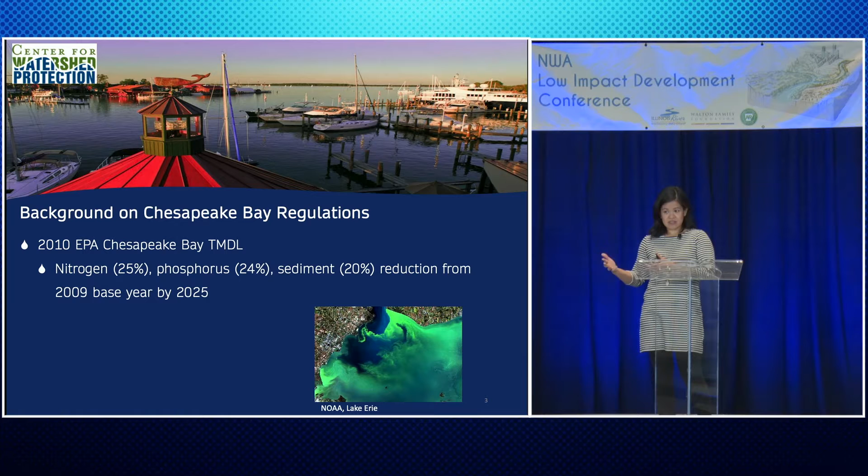But a lot of times the reason why the algal blooms are bad for the environment is because when algae die, all this algae sinks to the bottom of your river or lake or whatever, and it's the bacteria that break down that algae. It uses oxygen to break down the dead algae, and it sucks up all of the oxygen from the water column and basically creates a dead zone.

So what happens is a fish is happily swimming and hits this dead zone and basically just suffocates. And it creates these fish kills like in the picture on the left. And so that's why nitrogen and phosphorus is a huge issue when it comes to water quality. And the TMDLs are all based off of, what is it called? Your swimmable, fishable, drinkable. Because it's part of the Clean Water Act.

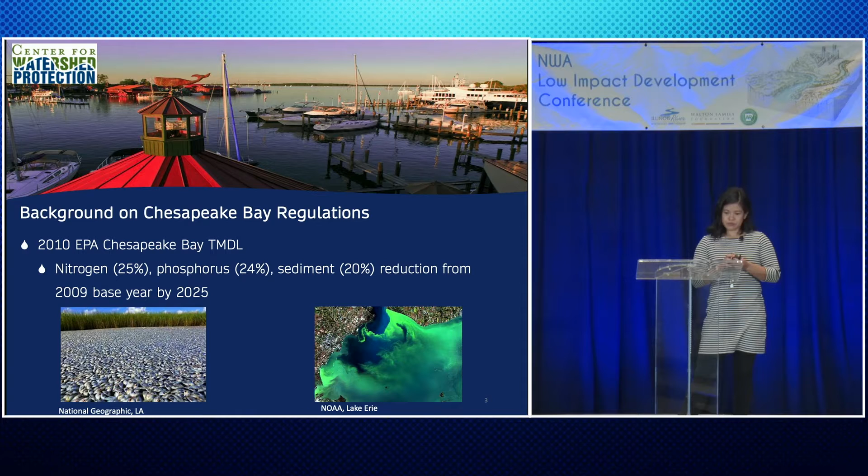And the fishable part and the macroinvertebrates and the stream health is actually an extremely important part in a TMDL. And so that's one of the reasons why nitrogen, phosphorus, and sediment, which we typically just call nutrients, are a huge issue in the Chesapeake Bay. We talked about this, 6 states and DC. Here's a little map of the Chesapeake Bay watershed.

The collaboration process involved in this Chesapeake TMDL is very stressful, but actually an amazing feat that the EPA and the Chesapeake Bay Program have done. So within these 6 states and DC, there's actually 5 sectors that everything is kind of divided into. Let me see here. Let me go back real quick. Sorry, I did the animations too early.

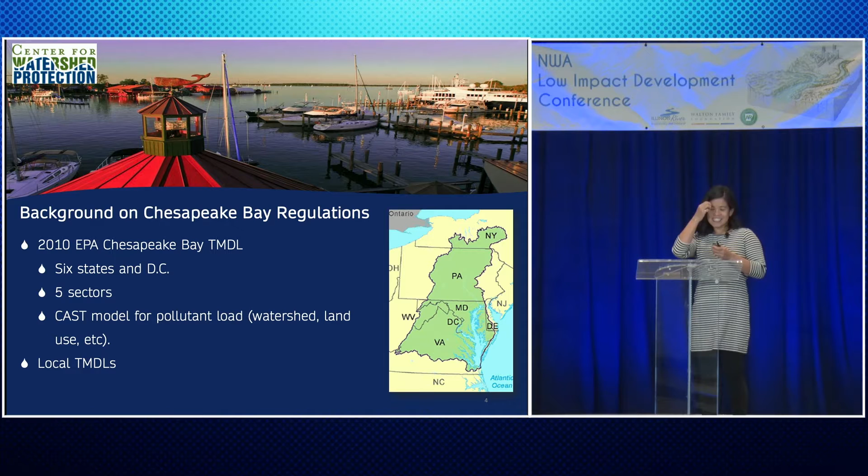There's 5 sectors that it is divided into. So the nitrogen reduction is divided into agriculture, natural, septic, stormwater, and wastewater. And this is very unique, I think, to the Chesapeake Bay. What I'm going to focus in on is stormwater, because that's where urban sits. So a lot of how you regulate it is in this stormwater piece, and it's urban stormwater. So it's regulated through the MS4 program.

And then this graph here is the actual nutrient load allowed, that is planned, I guess. So the first column is the 2017 load, and then the gray one on the right is the 2025 target. There's this target that EPA gives you, and it's up to Maryland to decide where in each sector and where in each watershed that reduction is actually happening.

And how they calculate this pollutant load is through this thing called the CAST model. I actually don't know what it stands for. It's Chesapeake Bay something, something tool. And this CAST model is something really, really smart modelers put together to estimate the pollutant load out of every watershed. The whole Chesapeake Bay is mapped out with every watershed's land use and their expected contributing nitrogen, phosphorus, and sediment load. So a lot of math goes in there and outputs something, and then the counties have to meet these regulations.

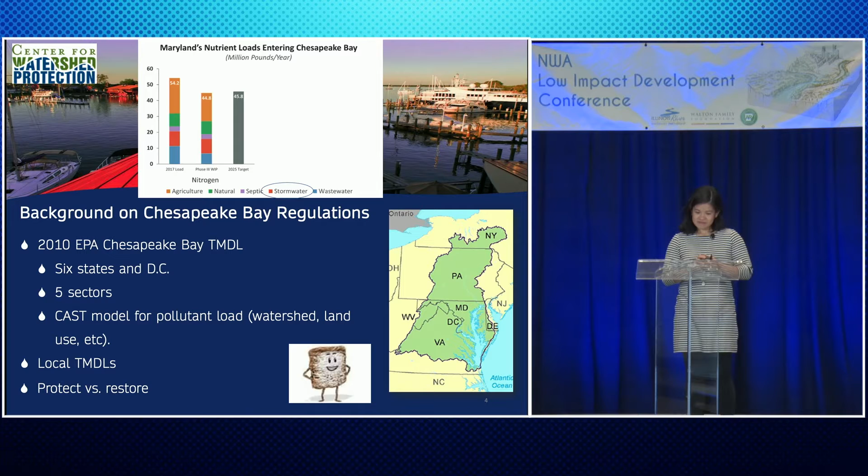The mini wheats thing, save some of the mini wheats.

So next I'm gonna go into DC stormwater regulations. So DC is very different than Northwest Arkansas. It's 43% impervious area. It is a phase 1 MS4. It is also a mix of MS4 and combined sewer. So it's about 2/3 MS4 and 1/3 combined sewer.

And in the combined sewer, like Henderson talked about, that is managed through their consent decree, and green infrastructure is required through that consent decree, but that is separate from the MS4 permit. And so in the MS4 permit, I am an engineer, so I included some equations. You don't have to understand them. If you really want to understand them, everything is in the Stormwater Guidebook, which is on the DOEE website. So DOEE, the District Department of Energy and Environment, manages the MS4 program, and DC Water manages the combined sewer program. So they're two separate organizations, which gets a little bit confusing.

So for the stormwater regulations, the retention requirement is if there's land disturbance or substantial improvement more than 5,000 square feet, you have to retain 0.8 or 1.2 inches of that stormwater per square foot. There's a little asterisk because there's a lot of caveats with DC. There's a lot of little nuances about this rule, but I just simplified it because it's not super important in this presentation. So that equation there is kind of how you calculate it. It is based off of the runoff coefficient and the size of your land disturbance.

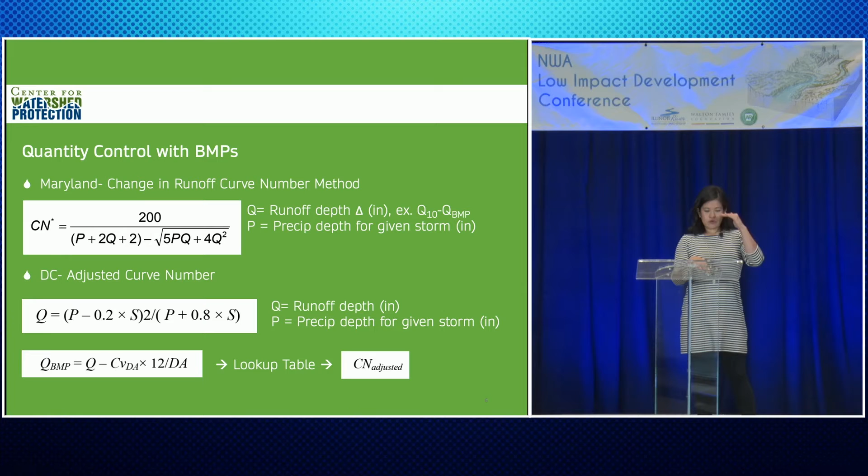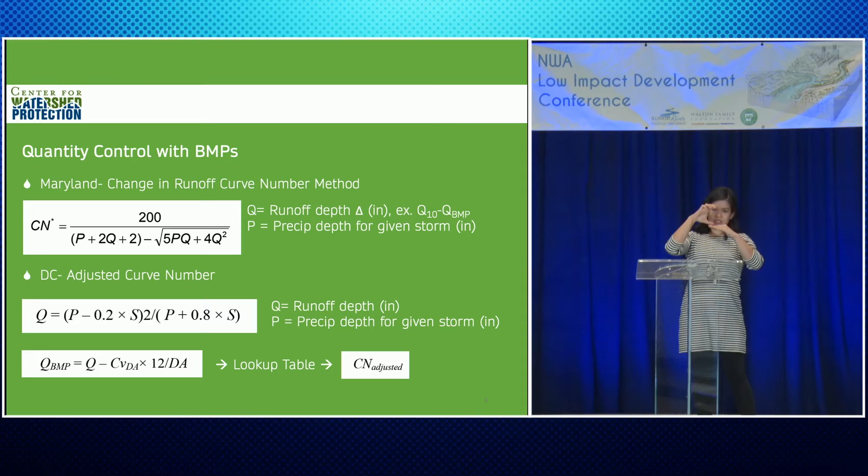I added this slide because Andy talked about quantity control and BMPs and requiring both things and it not being integrated into one calculation. In Maryland and in DC, there's different methods of how they incorporate BMPs into their quantity control. I'm not gonna go into detail about the exact math of these two things, but they're all based off of a curve number and changing your curve number. So you have your existing curve number and then your post-construction curve number. It's to decrease this curve number by a little bit based on the storage you have with your BMP. So then you have this difference that you have to account for.

So here is a list of approved BMPs in DC. Again, I want to emphasize that these are for MS4 regulations. For the TMDL, it's something slightly different because TMDLs don't just cover urban stormwater. In the Chesapeake Bay, you can also have restoration projects, which are not technically part of your MS4 program, to meet your TMDL goals. So what I'm talking about here is specifically for your MS4 BMPs.

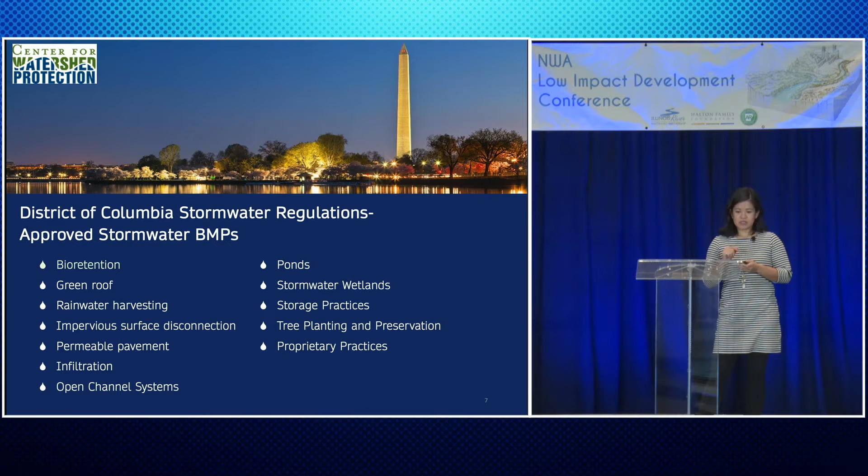And there's bioretention, green roof, rainwater harvesting, permeable pavement, but I'm just gonna focus in on bioretention because I only have 30 minutes left. So what exactly is a bioretention? Sometimes it's called rain gardens, sometimes it's called bioswales, biofilters, biofiltration. The previous speaker called it stormwater control measures. In DC, we call them best management practices, and we're probably gonna change that name because of the problem with the word best, but that's what I call them, so that's what we're calling them here.

So bioretention, basically all of these things are somewhat similar. It's a depression in the ground, it has plants, and there is some sort of soil media that allows for infiltration. And it may have an underdrain and it may have a gravel layer.

So the plants are really important in a bioretention. It's just part of the bio part of bioretention. The plants have multiple purposes. One, it sucks up the water, which in turn sucks up the nitrogen and phosphorus. A lot of that's dissolved in the water, and uses it as fertilizer. And so the plants suck up the nutrients, aka the pollutants of concern in the Chesapeake, and then that water evapotranspirates back into the water cycle. So it kind of removes that water from the stormwater system.

And then the roots also allow for basically keeping the soils fluffy, because compaction is a big issue when it comes to bioretention maintenance. Once that soil gets compacted, water can't filter through, right? And so the plants and the plant roots help keep it nice and fluffy and water still able to move through the water column.

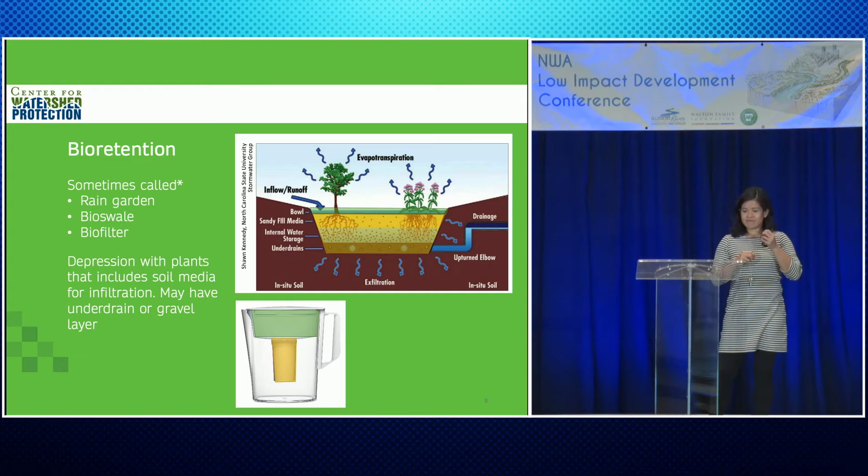And then there's your filter. A lot of stuff is happening in there. And it can't just kind of flush straight through because it does need time for the soil particles to do whatever reaction it needs to, whether it's absorption, adsorption, just simply filtering it, holding back some of the larger pieces of sediment. Whatever it is, some time needs to pass for that water to trickle through and be clean from the filter media. And then cleaner water comes out the other end, just like in a bioretention.

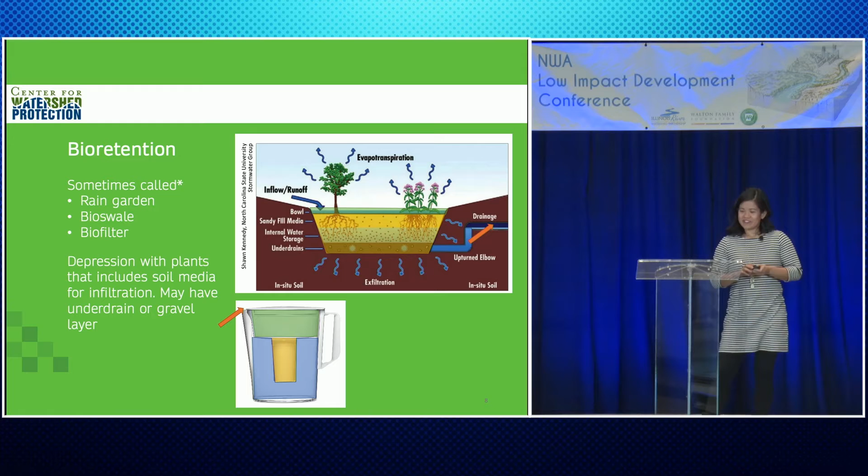The cleaner water can either exfiltrate into the ground or come out of the underdrain into the storm drain pipe. Oh, and it also has to leave the system as cleaner water. So, great, water has disappeared. What actually happens? Like, is that blue piece of water actually cleaner?

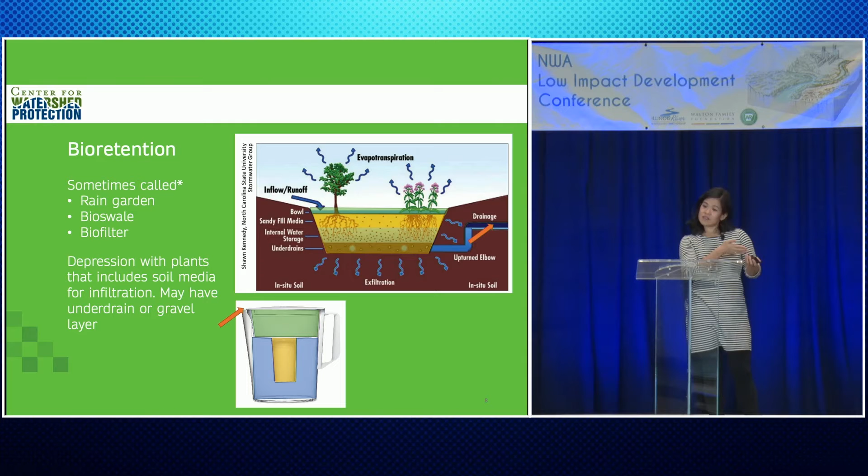There's a lot of research out there that has been done to measure what your actual removal efficiencies are. Minnesota does a lot of work, and Ohio State, and Kentucky, and there's just a lot of schools that do bioretention performance research. The reduction number is really based on how it was designed. And it's always hard for me to say, oh, it's 75%, because it really depends on what your design criteria are and how it was designed when you were testing it in the lab.

So one example I pulled out is the Minnesota Stormwater Manual, and they provide recommended pollutant removal efficiencies. But again, it really depends on how it was designed. And I think these removal efficiencies are based on Minnesota's design requirements.

And so the way that DC kind of gets out of doing this kind of calculation and really thinking about the removal efficiencies is that they just base everything off of the retention volume. So that volume that gets sucked into the ground, we're saying that it's a 100% removal efficiency rate because, in the sense of the bioretention and out the storm drain pipe, the water's not there anymore.

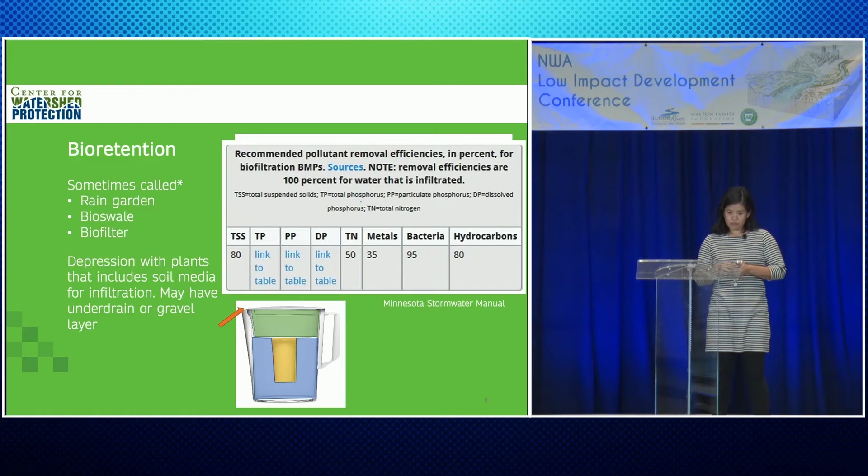And one of the important things is that it really depends on your pollutant of concern. Taking a stormwater manual from California, they might not care about nitrogen and phosphorus nearly as much as the Chesapeake Bay does, or you guys might not care about nitrogen and phosphorus. I know you guys do, but let's just say every state and every jurisdiction and every water body has different concerns, and to have an overarching design criteria, I think doesn't fit with how

bioretentions are designed. So I just want to point that out, that there is no one right answer in terms of design criteria, but I will talk about DC's design criteria just to give you an idea. When you break it down, every criteria item, there's a reason for it, and I can probably tell you the reason for almost every single one of these and why it is the number that it is for DC.

So it's really important to think about when you're looking at your design criteria, why was that number created? And DC and the Bay Area tend to be a little bit more picky about these details than some other states might be, so you don't want to add undue requirements for reasons that you might not care about, that might not be important to your water body.

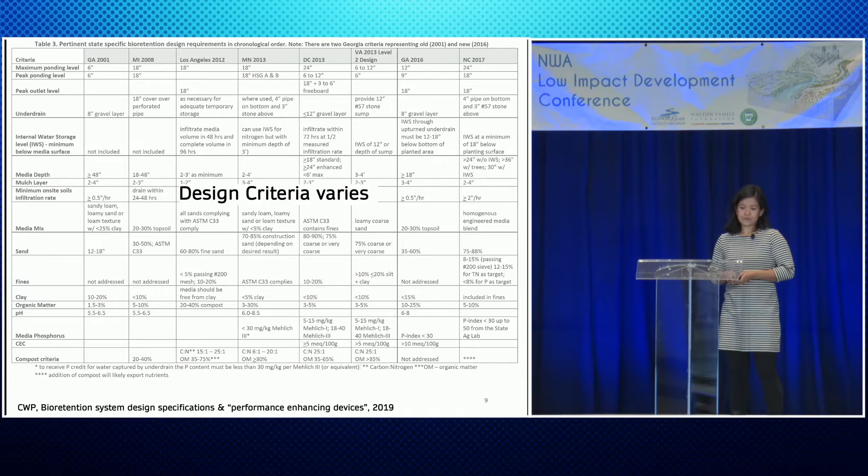So, DC's bioretention design criteria. One of the first questions to ask is there infiltration into your native soils? In DC, we call it infiltration, but a lot of places it's called exfiltration because you're leaving the system. Best case scenario is you have some nice sandy soils and water just kind of trickles down into the ground. Not typical in DC. It's very, very urban. Everything is redevelopment. And so a lot of the times, I would probably say 50 to 75% of plans that I see are standard design because there is no infiltration into the native soils.

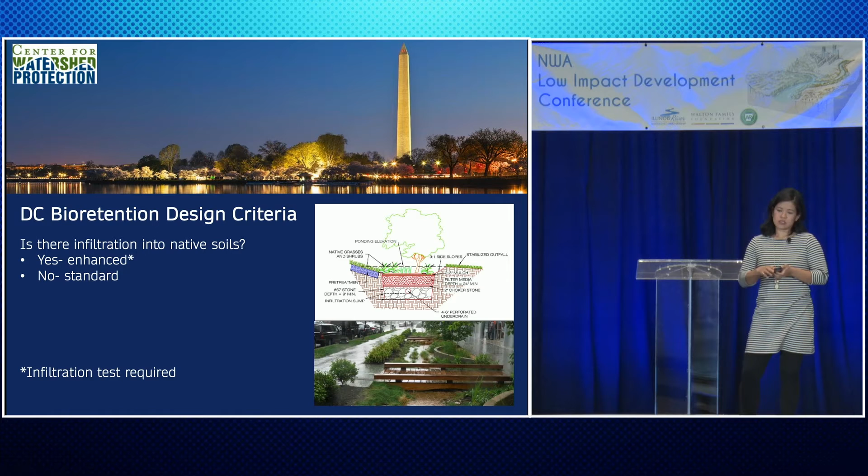So if it does have infiltration, it's enhanced. If it doesn't, it's standard. It's kind of how, in Virginia or Nashville and Fayetteville, there's a level 1 and level 2. It's kind of that idea of, there's a higher standard for better infiltration systems. And an infiltration test is required in DC.

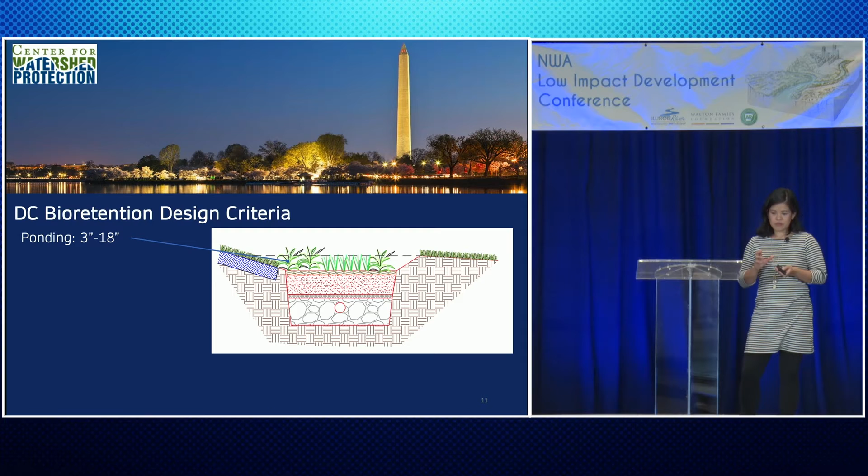So I'm just going to go through really quickly some of the design guidances. Ponding, 3 to 18 inches. Filter media, depends if it's standard or enhanced. And the filter media depth is really about, in the end, the retention time. You need a longer system, just like your Brita filter, right? If you want it to retain for longer and water to have a longer time of concentration, time passing through all of the different medias, because that way the filter media has the ability to absorb some of the pollutants in the water.

In the filter media composition, typically a lot of times it's mostly sand and very little organic content. The organic content percentage really varies a lot depending on what jurisdiction you're in. In DC, we don't allow for high organic content because nutrient is the pollutant. So if you have high organic content, you're just repolluting your water. So that's one of the reasons why.

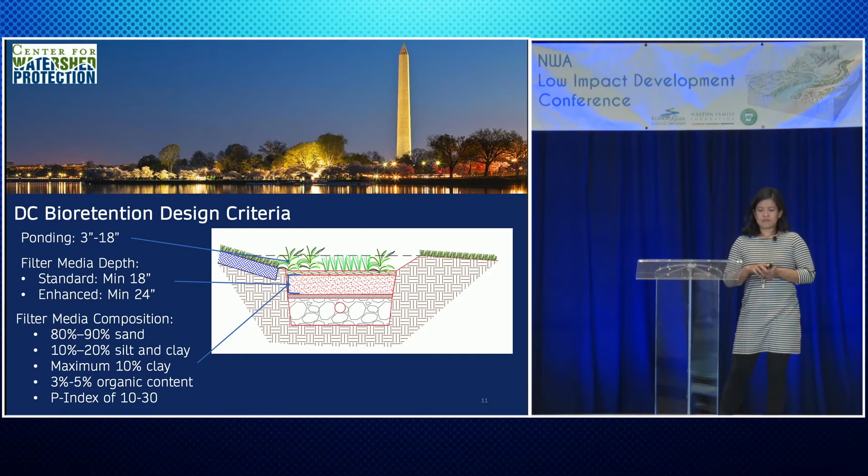And there is a lot of debate about this because super sandy soils, low organic content, does not make a good space for plants to survive. So, we always want to say, we want to plant native species in our bioretention and have pollinators, but these aren't native soil types. They're not happy places for plants. So we have to be very strategic about what type of plants we put into a bioretention and make sure that they survive with these filter media requirements.

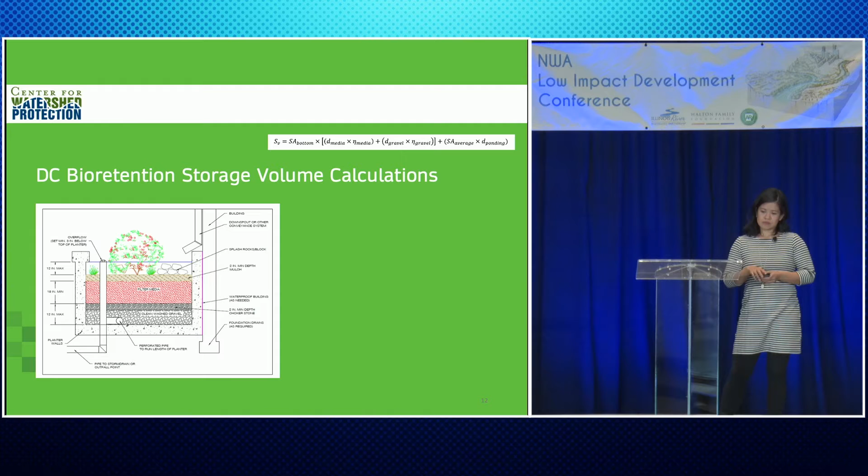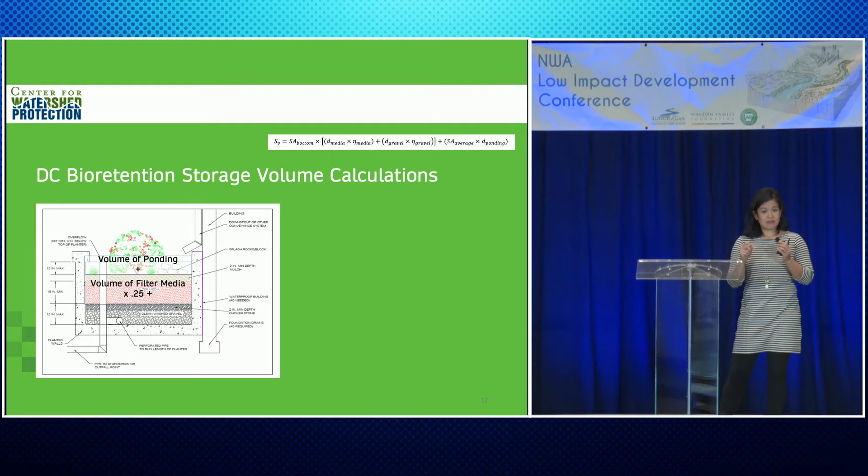So next, some more calculations. How does DC calculate their storage volume? It's designed like a planter box, basically. Here's the equation, but I'll break it down. It's very, very simple. It's basically the volume of ponding that you have, plus the volume of the filter media times 0.25, which is the porosity of the filter media. So that's the little pore space. 25% of that volume box of filter media can be filled with water.

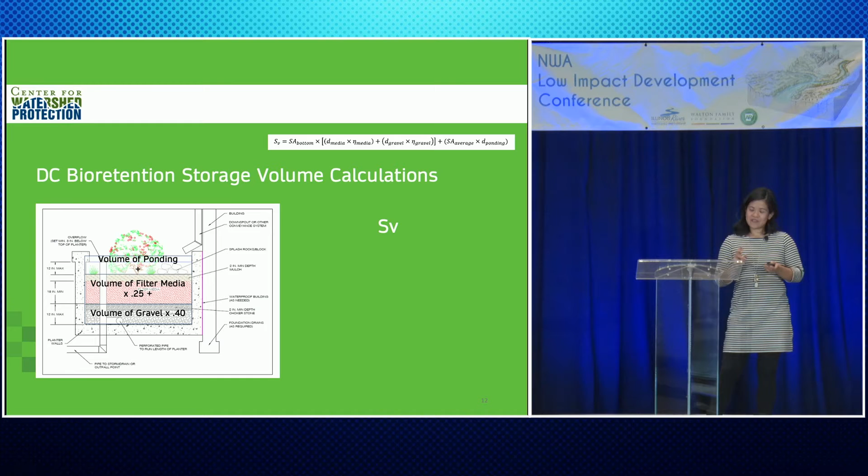And then below that is the gravel, and that porosity is 0.4. So in a box of gravel, 40% of the space is airspace that can be filled with water. You add all those up, and that is your storage volume, almost. So that is technically your storage volume, but for enhanced, you are allowed to account for 100% of your storage volume. For standard, you account for 60% of your storage volume. So that's just saying, a standard is not going to perform quite as well because there's no infiltration into the existing, so you only get 60% of your storage volume.

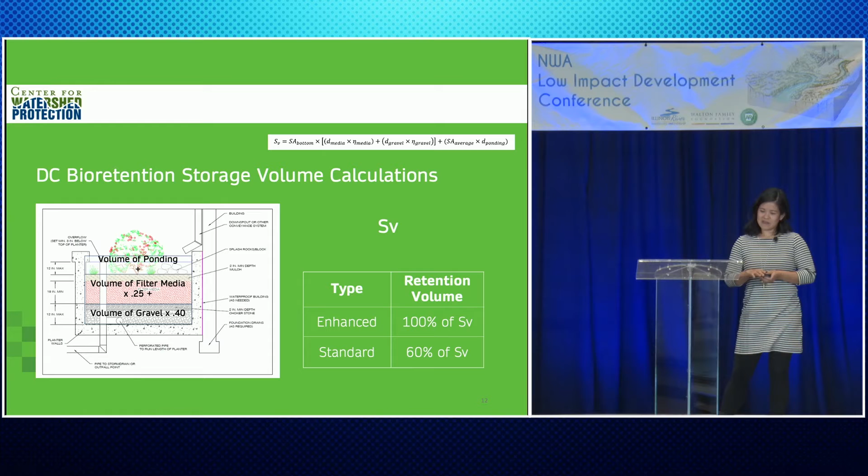Let's see here. So that's kind of the summary of DC bioretention and DC regulations. There's a lot more I can talk about; we have a training for this and it's like 6 hours long. So I really distilled, I think, the important stuff that you guys might be interested in. But there are free trainings on the DOEE website if you want to learn more about how DC calculates their stormwater retention requirements.

So I just wanted to throw in some examples of practices that we've put in. And I did focus in a little bit more on detention ponds, because I know you guys have a lot of those that are failing. And so at the center, we mostly work in the restoration realm. We don't work with new developments.

We are a nonprofit. And so in Maryland, and in DC, it's a lot more about restoration, because everything's already developed. So to meet their TMDL goals, a lot of practices have to be put in somewhere that's already existing. Some existing parking lot or school or field is where we were putting in a lot of the stormwater BMPs. So for this specific project, it was an existing dry pond in a church.

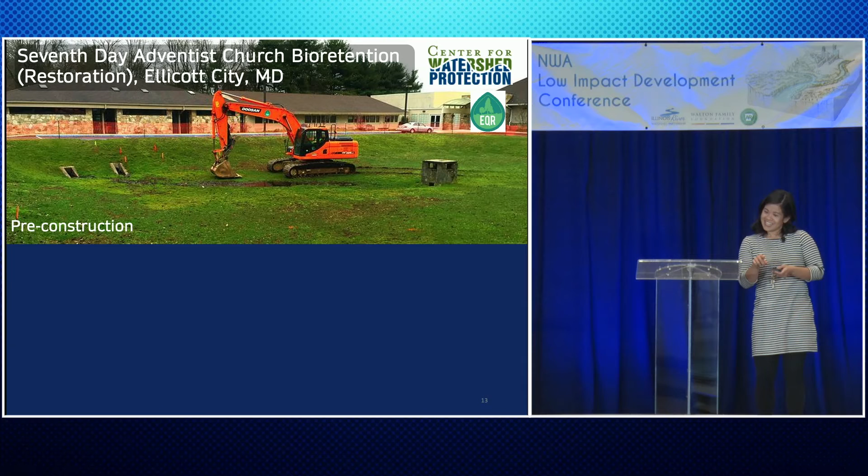And this is pre-construction, but I couldn't find the pre-construction picture, so technically this is right during construction. But it is a dry pond, and those two little concrete pieces are the inlets into the pond. And this is what it looks like afterwards. It looks very, very similar, but it's actually a bioretention underneath. We added these, the little white gravel is allowing for pretreatment, and I think I have another slide about it, but

pretreatment, we found, is extremely important in bioretention design. I think Ted mentioned their bioretention maintenance, what did he say, like 5 or 10 years, he would have to dig up the filter media and replace it. We've learned that you can add a pretreatment system, and it can be as simple as a little triangle of your bioretention, or, and some might not like it, I build a little concrete pretreatment because maintenance is so much easier in concrete than trying to clean out grass or those little gravel pieces.

Trying to clean out sediment between riprap is really hard. So we want to make everything easier for the maintenance team. So I personally like having a little concrete path that can hold back some of that sediment so that they can literally just take a flat edge shovel and take out all that sediment that builds up there. And obviously it depends on what your drainage area is, whether or not you even have a sediment problem. If it's a very low sediment load place, then it's not nearly as important.

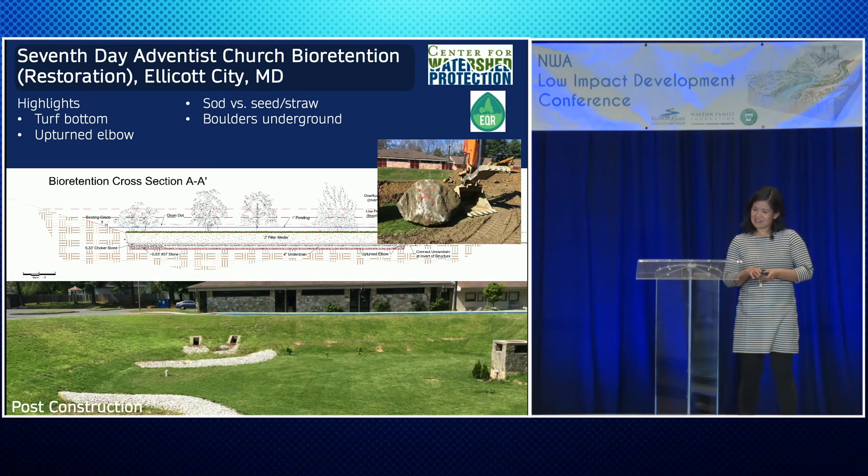Oh, one other thing is that 2 years ago, I think it was 2019, we wrote a guide for retrofitting stormwater ponds on private lands. I actually didn't know about this, Leif, until we talked to you guys. I was like, let me look at what we've done. And so it is about those HOAs that haven't managed their stormwater ponds and what to do with it, how to prioritize it, and kind of what should be done to revitalize a lot of these stormwater practices.

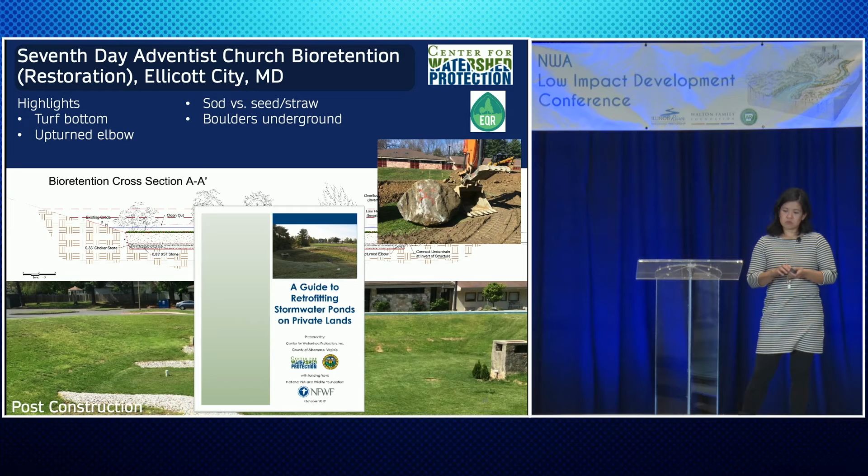And in Maryland, our baseline for our TMDL is based on 2009. So if the stormwater practice was either already not functioning at 2009 or you make improvements on it, basically that difference, the improvement that you make on it, you can account for your TMDL, which is why retrofitting ponds, since you don't have to deal with the landowner piece of it, is popular in the Chesapeake Bay area.

All right, so some quick lessons learned. When I was practicing this, I was like, most of these lessons learned are because of maintenance. The things that we do to design these and figure these things out have so much to do with maintenance because it is extremely important. When we talk about siting it, having the community and landowner engagement is extremely important. It's one of those things where we think we know what's best, but we don't. And so making sure that the community understands well what's going on is super helpful.

Utilities, I hate utilities. Again, because in the DC, Maryland area, everything's been developed. There are utilities everywhere. There's really old utilities that no one knows about. I've hit so many lines during construction, not me personally, but it's a nightmare. But you have to do the best you can. And typically, if there's a utility there, I'm like, I'm not building anything over there.

When you're designing a BMP, I guess I'm talking more specifically here about bioretention, I've started not designing with a mulch cover anymore, because when you add mulch to your beautiful bioretention, basically the first time it rains, all that hardwood shredded mulch just kind of floats up and out into your overflow, into your storm drain, and clogs your storm drain.

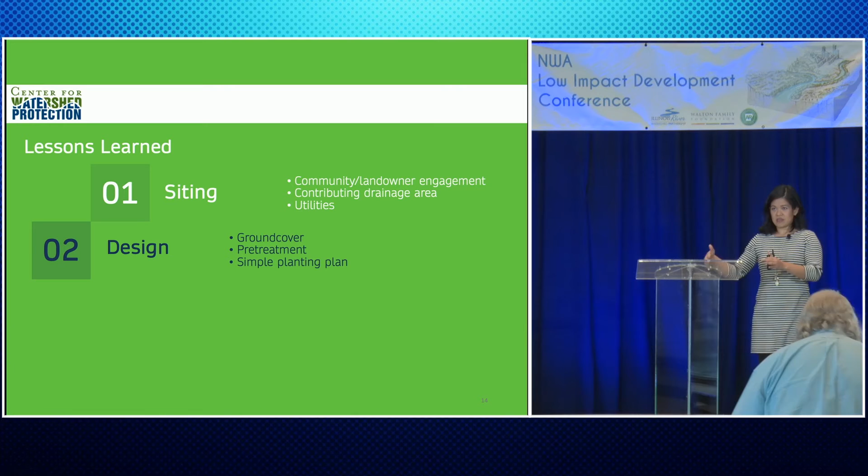And then a simple planting palette. Even with a native palette, having a simple planting palette is very advantageous, especially for communities that might not have experts or might not have the ability to hire experts. Having a guide that has your 10 plants, 5 plants, and says what it should look like, when you should cut them, what they look like in the winter, summer, fall, and spring, and what needs to be done, I think is a really good way to have your planting palette done.

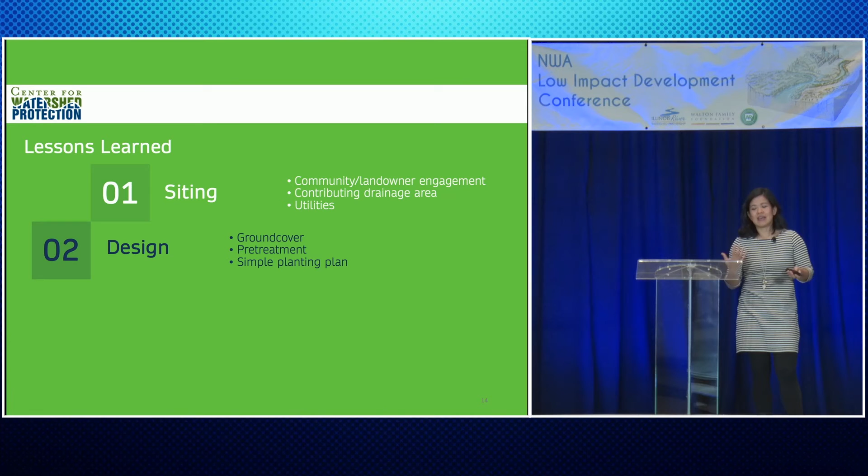But if your community loves landscaping and loves flowers and pretty vegetation, then you can have a more complex planting palette. It really depends on who you're working with.

I'm just gonna skip through this because of time.

Maintenance. Having a set routine maintenance and making sure that it's communicated with the community or whoever you're working with is extremely important. The maintenance of the vegetation and sediment keeps the function of your BMP. And then there is a difference between routine maintenance and restorative maintenance. Routine maintenance is like changing your oil. Restorative maintenance is like replacing your engine. And we want to avoid restorative maintenance because it gets really expensive.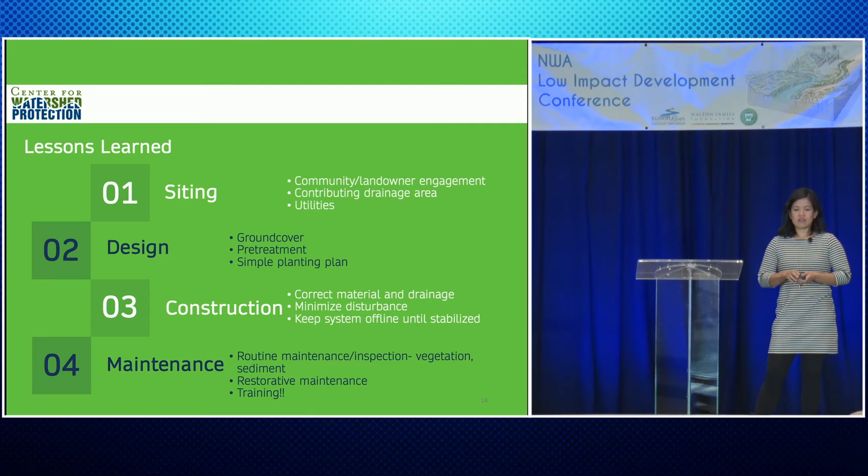And this has happened a lot in Maryland, where a BMP completely fails in 5 years because there is no maintenance, and the plan was for 30. And EPA comes in and says, well, this isn't working, you can't account for this. So you have to replace the whole thing to make sure that it's working correctly. And then again, training on all of these things is extremely important as well. You get trained on how to lay pipes. You should get trained on how to maintain a BMP.

And then one of the really important things is that this is an iterative process. The things that you learn through maintenance, you should bring back to your engineers and designers and construction crew to make those changes to make everything easier. And having open communication between all of your partners is really important for a working BMP.

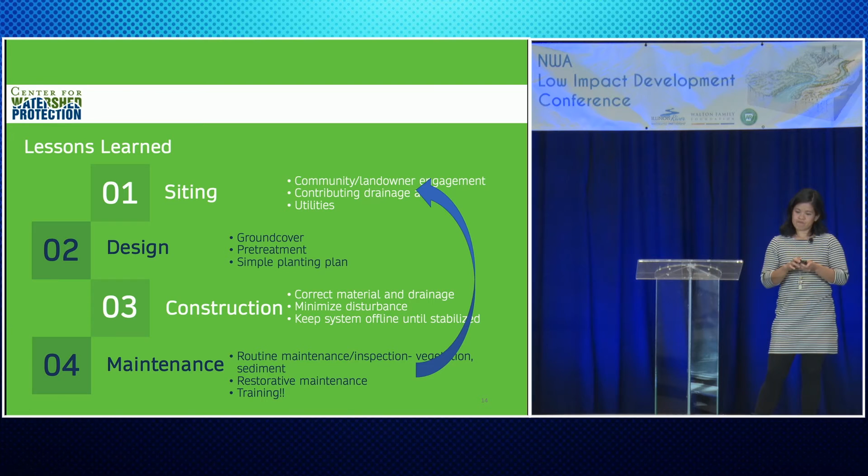Okay, so bonus slides. I was talking about bioretention, but through the presentations yesterday and conversations with Leif and Morgan, I added regenerative stormwater conveyance systems into this presentation, because I thought they might be useful for you. It's a fairly new stormwater BMP, developed in Anne Arundel County in Maryland. They're also called step pool conveyance systems or coastal plain outfalls. It's really a method to restore an eroding channel through a series of pools that can help dissipate energy, stabilize conveyance, and provide some treatment. It's typically designed for the 100-year storm.

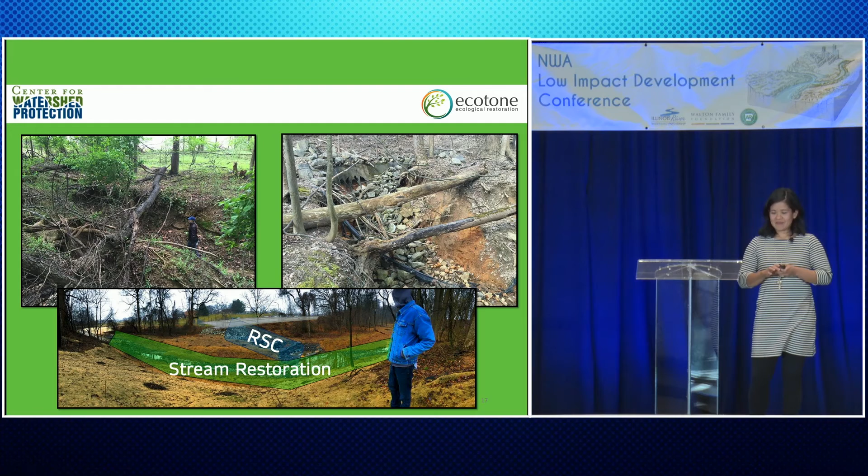So let's see. This is the same project, but zoomed in on the before and after. The pipe is where my colleague is, a little bit to the right of her. And you can see the fence is the same. So that original pipe kept cutting down into the gully, and so we had to lift the bottom of the gully, and the whole stream was lifted to reconnect to the floodplain anyways. But you have to do a lot of cutting, because with really high flows, one of the ways to dissipate energy is to make it wider. So we widened the outfall to allow for that energy dissipation.

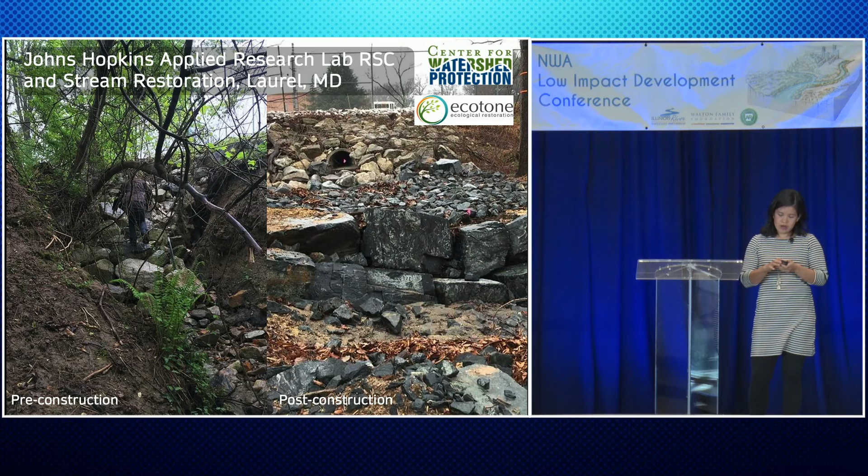Really quickly, another RSC project: there was a fire pond in the town of Newmarket. It was no longer a fire pond. Historically, it was used by their fire department, but they have since upgraded. So it was just this green pond that the community didn't really like. This project had a lot of community involvement and discussion as to what they wanted this pond to turn into. They really wanted a recreational area, so we ended up designing an RSC. The pond wasn't functional anymore, and they didn't need it, so we could dewater it. Also their embankment was failing, so removing the pond was something the town would have liked rather than replacing the embankment. So we put an RSC for water quality treatment in there.

So some additional resources that we have: we created the Better Site Design Manual in '98, so it's quite outdated, but we did update our codes and ordinance worksheet, which talks about different codes and ordinances that cities or jurisdictions can have to reduce their stormwater impacts. There's a bunch of guidance that the center provides.

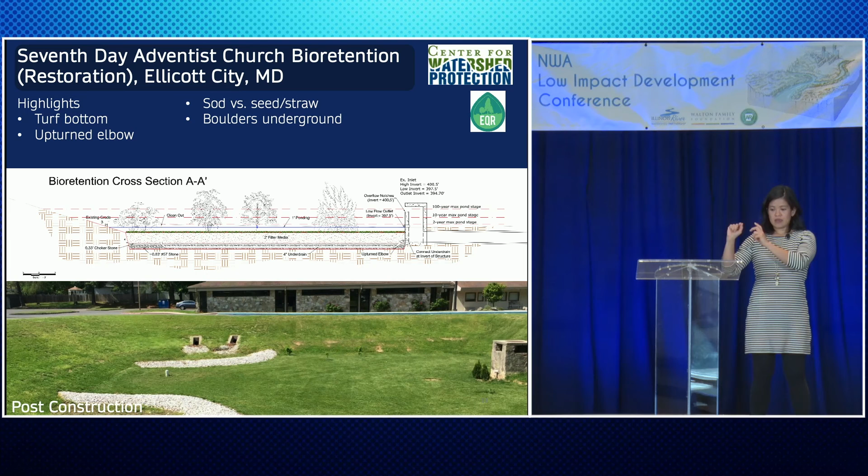And then once that water ponds up to the invert of the elbow, that water will go into that catch basin and into the storm drain. Answer all your questions, Travis? Yeah, great. Okay. Thanks for that explanation.

So you mentioned maintenance on this project, and you mentioned training in another slide. When you do a retrofit like this, or for new construction potentially as well, do you have any kind of process or steps you go through in terms of ensuring that there's a maintenance plan in place? Yeah, I mean, it depends on which jurisdiction we're working in.

In Maryland, in restoration projects like this, it's with the homeowner. In Anne Arundel County, I think the previous speaker mentioned something similar, the landowner for restoration projects is responsible for the routine maintenance, but any structural maintenance that requires an engineer, the county will go in and fix. So there's kind of a shared maintenance responsibility. In DC, it is part of your covenant, so this BMP actually goes on your deed, so you can't just write it off when you sell your place.

And the homeowner is required to maintain that as part of the covenant. And in public spaces, maintenance is always an issue. But right now, they've transferred a lot of the responsibility to DOE for stormwater maintenance because they realize, as a district as a whole, the piecemeal maintenance, DDOT maintaining it, Parks maintaining it, well, actually I don't think DC Water is part of it, but DOE maintaining some of it,

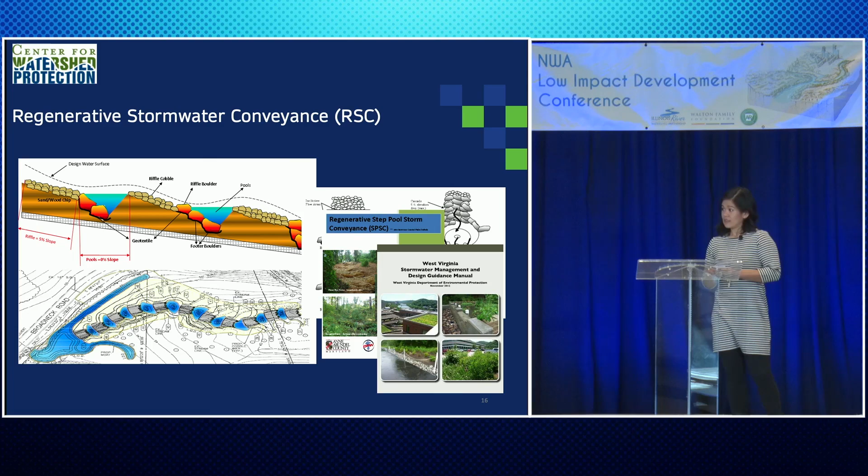Some people put them inside a stream restoration project. We don't typically design like that because we don't do a whole lot of stream restoration projects. So yeah, even that is always changing. Great, thanks. And John Pennington reminded us that Watershed Conservation Resource Center has actually put some of these in Northwest Arkansas. That's so awesome.